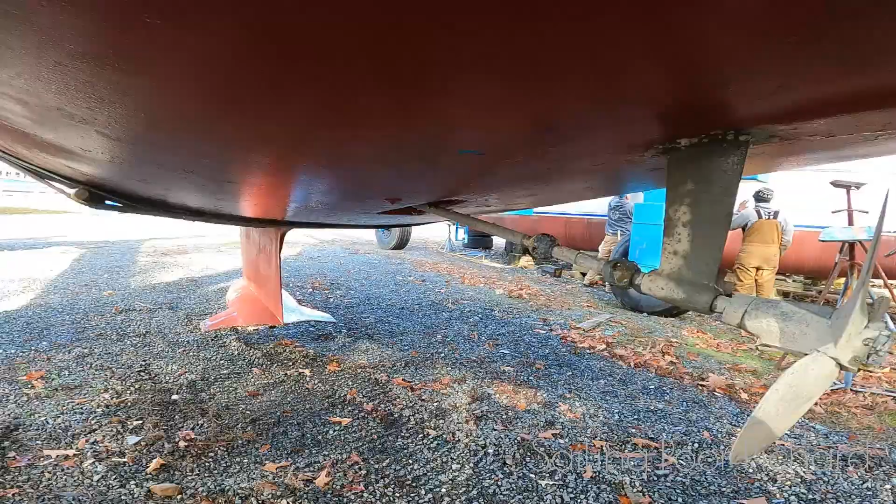Today on Sailing Poor Richard, we take an even closer look at the flow around the keel using a mesh on the geometry.

This all begins from a Rhino model that I remeshed with a quad mesh, remesh quad. This is pretty cool, and this is exported as stereolithography, which triangulates it again. But it's a very nicely organized mesh, which works pretty well for CFD analysis.

It's one of those things that I do, aside from being the assistant director of the waterfront, associate director of the waterfront at St. Mary's College.

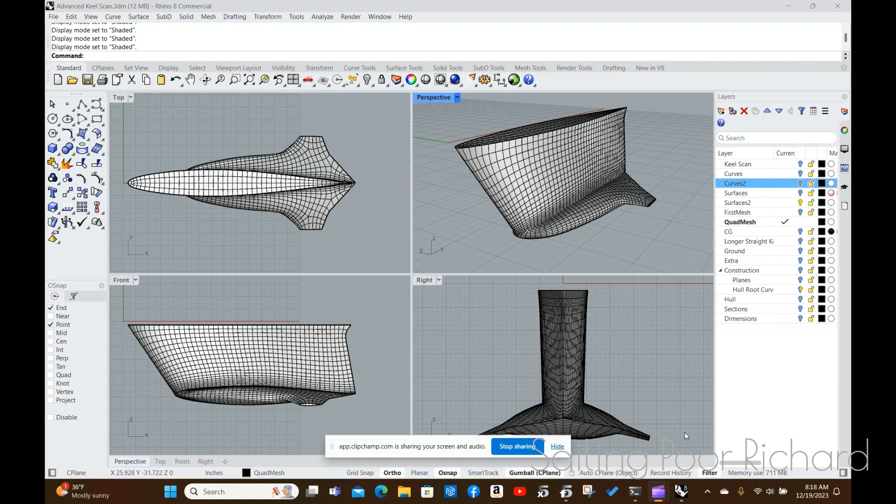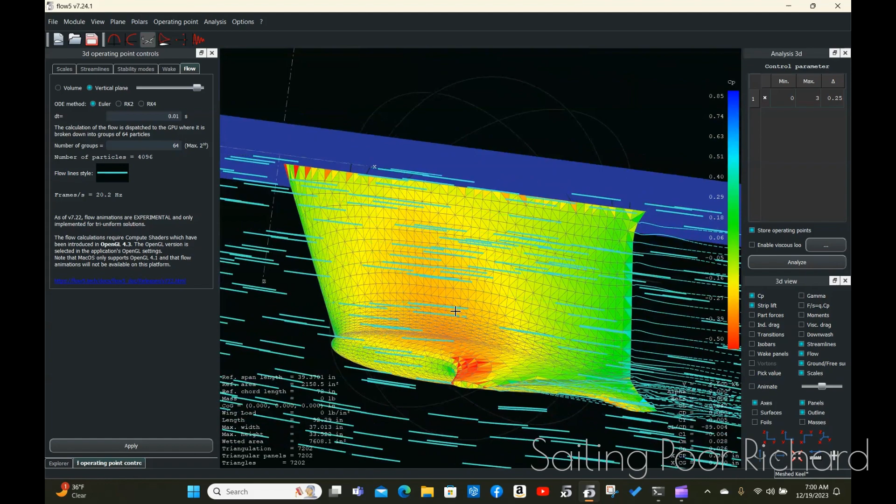For those of you who really wanted to see it, here's a more detailed ground plane, or well, end plane, underwater shot of the keel. I don't have the bottom of the bulb modeled very well because there's a little protrusion down there, but this is pretty mesmerizing to me.

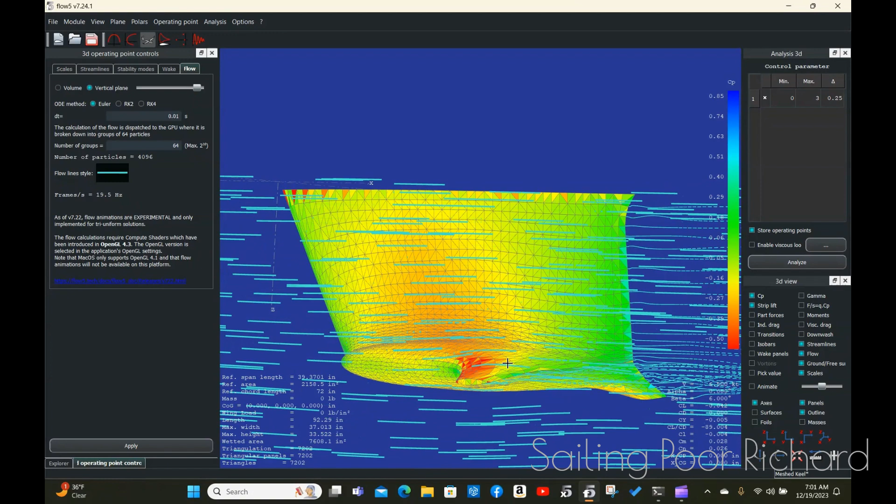This is pretty cool. So you can see the pressure distribution, which is mapped here. This is at 6.5 knots, which is a pretty typical speed for the Hunter. I'm liking it. It's pretty cool.

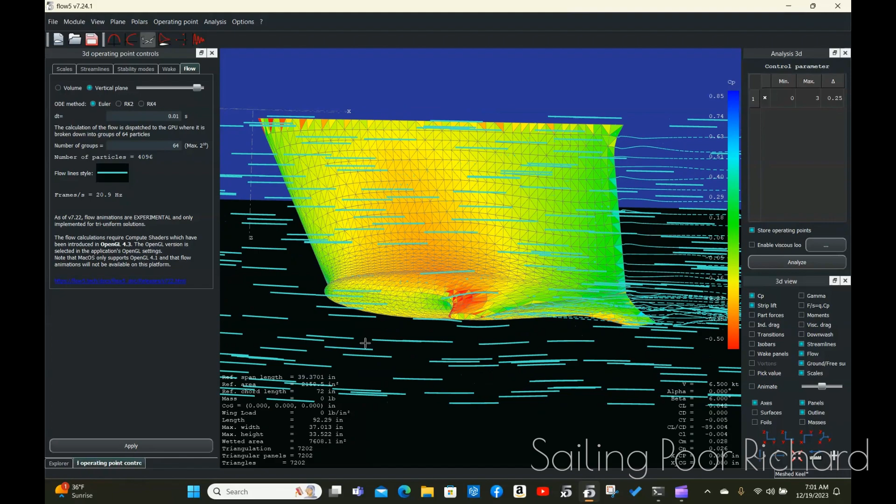Pretty neat. This is more educational though, because without it being horizontal, I can't show you the polars because it's at a beta angle, which is a skew angle, or yaw angle. We can also show the flow as if we're blowing smoke or have dye in the water, and we can move that around, which is really pretty cool.

Now we're looking at it flying along in a pretty serious angle. Let's go on the other side here. So this is a cute factor, but it's not really that useful at producing numbers. It just lets you understand what's happening here.

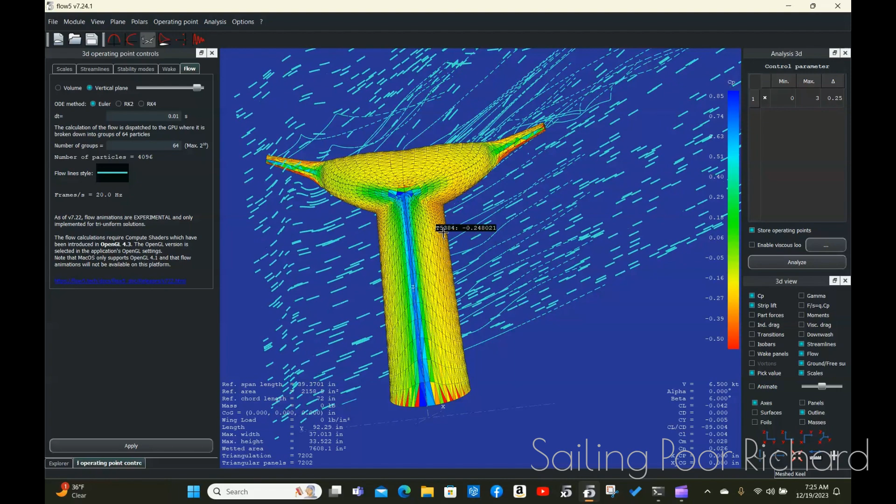What's happening is the bulb is stopping the tip vortex while also making a lot of weight down low on the keel. This picture is showing you the pressure difference with the coefficient of pressure, really. It's all useful.

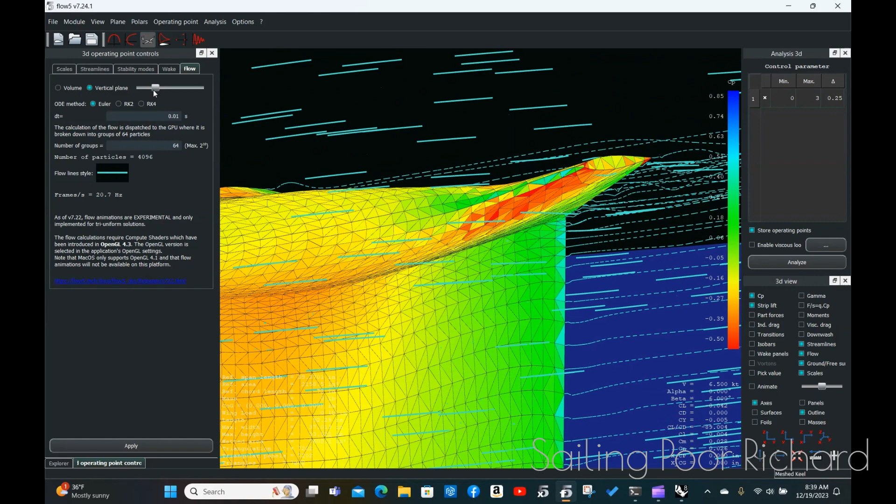It's interesting to me to see how hard the wingtips really work. I mean, the winglets work pretty hard, and of course this is not really at any kind of heel angle even. So I'm really surprised at how hard these little winglets work. It's doing a lot of work to straighten the flow.

It's inhibiting the tip vortex, of course, which is improving the lift at the lower part of the keel. A lot, turns out. There's actually a lot of lift happening down there. It's very impressive.

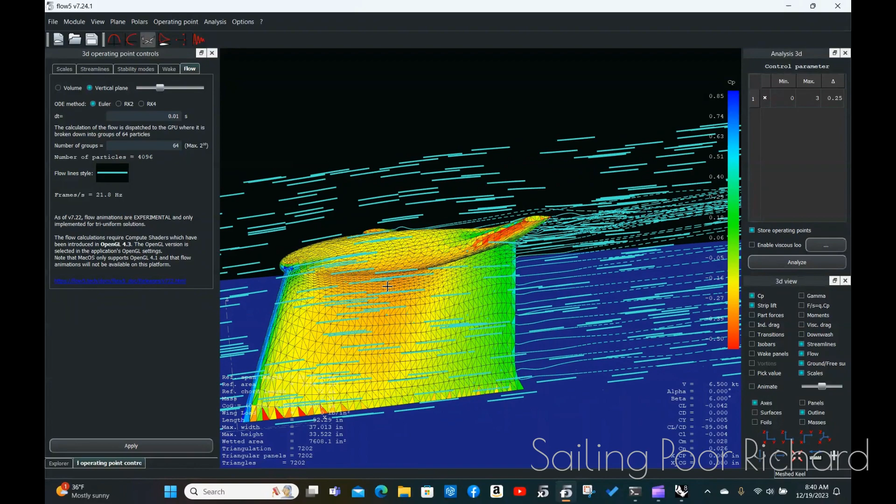We hope you enjoyed this short video about the Hunter 35 Legend winged keel.